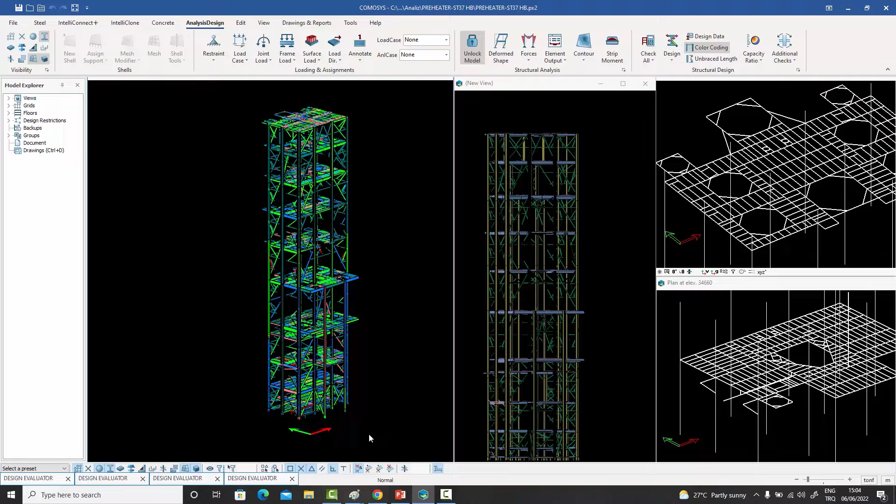What you do is you simply select the model and go to your Design Evaluator. So imagine this model has been given to me by a young engineer asking for my comments on it. I just press OK, and this fills up the Design Evaluator form. My whole purpose right now is to spend 10-15 minutes on this model and give the fresh engineer some feedback.

So the first thing it does is give me a breakdown of all the columns, beams, vertical bracings, horizontal bracings, girts and purlins, how much they are by weight. The columns are 53% by weight, the beams are 31%, the vertical bracing is 13%. And I can also see how the columns are generally failing. The normal stress ratio is averaging around 0.57. The lambda ratios are averaging about 0.118, and deflection ratios as well, because we haven't done the deflection checks on the columns. The overall drift check is different.

But more than that are these two over here, and these are typical areas where fresh engineers will make mistakes. For example, what I don't want is a lot of my elements failing because of lambda criteria. Let's say I don't want my lambda to be greater than 150 or 130, but they have designed it in such a way that a lot of elements are failing because of lambda. They would pass if they decreased the lambda and chose a higher section. But that's not what I want.

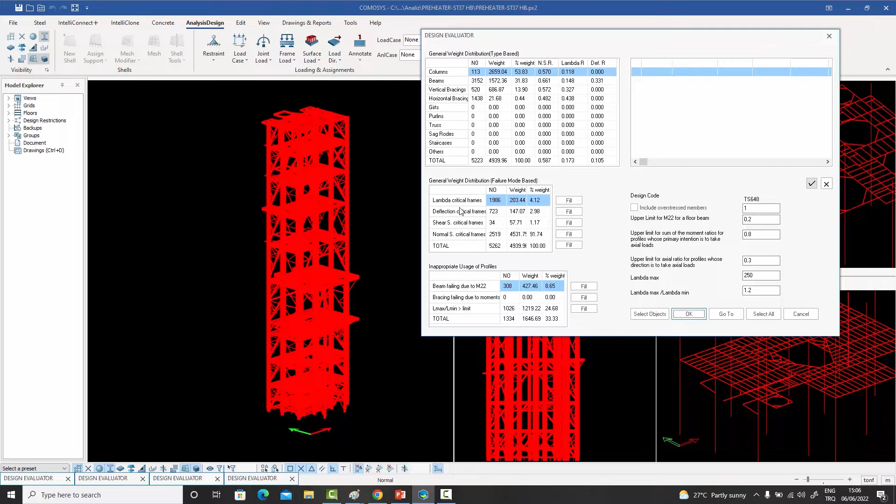What I want ideally is for all my sections to be approaching 1 as far as the normal stress ratio is concerned, because that represents optimal use of material. I don't want my elements failing because of lambda or deflection. Sometimes they have to, but that's not something I want. So this quickly shows me that 4.12% of my elements are lambda critical frames. I can press fill, this list is populated, and then I can select any one and say go to, and it'll take me to the model and show me exactly what's happening there.

The other thing I don't want is deflection critical frames. It says about 3% of your elements, which is fine, and this is not a bad design. I'm just giving an example that 3% of my elements are failing because of deflection. If I press fill, this list is populated again, and I can press go to and see individually whether there's something I could have done differently. Maybe I could have framed them differently and gotten a better design.

Similarly, what I don't want is shear critical elements. I want my elements to fail because of normal stress or bending stresses, not shear stresses, typically. So this number is reasonable again, only 1% where shear is governing. And for 91.74% normal stress is governing, and that's a very good sign. So this is a good design.

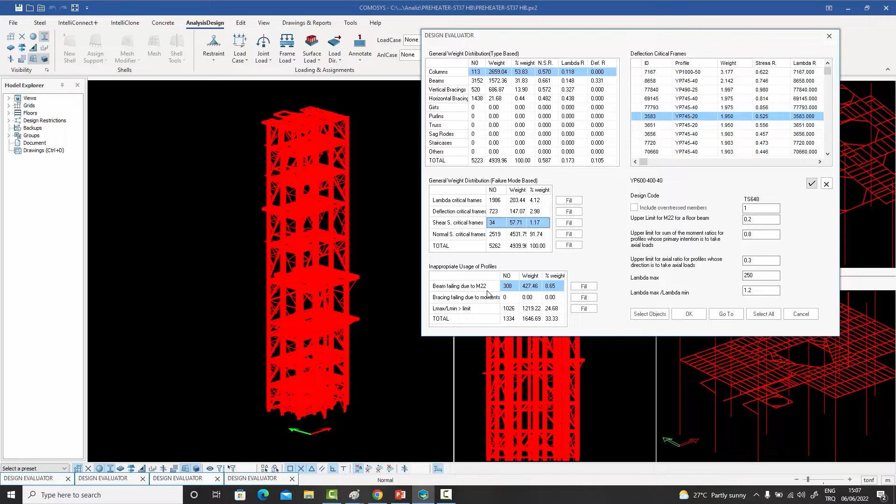But over here, we see these are floor beams. In floor beams, you want your beams to be dominantly loaded in the M33 direction. Of the three components, the axial component, the M33 component, and the M22 component, for the floor beams I want M33 to be dominant.

I don't want M2-2 to be dominant for the floor beams. But this one is telling me that about 8.65% of your total weight of beams has got a very high M2-2 ratio. So I'm interested in that. Let's press the fill button and go to this one over here and see that, okay, this one has an M2-2 ratio of 0.449. That's very high. I want this one to dominate.

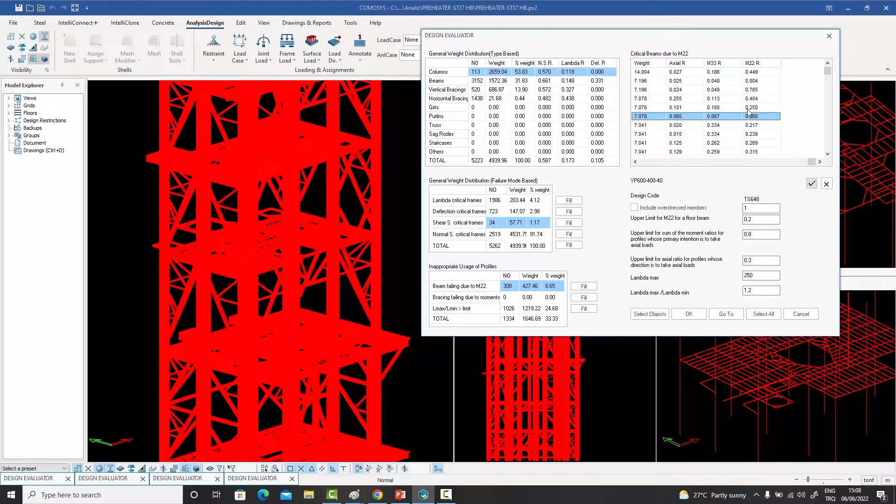So what I'll do is I'll select this one and say go to, and it takes me to that beam. And if I open up the design data, I see that yes, actually the bending 2-2 component is dominant, and that's not something I would have liked. So I can then take a look at it more carefully, and it's probably because of these horizontal bracings over there, and they're really pushing into it in a lateral direction.

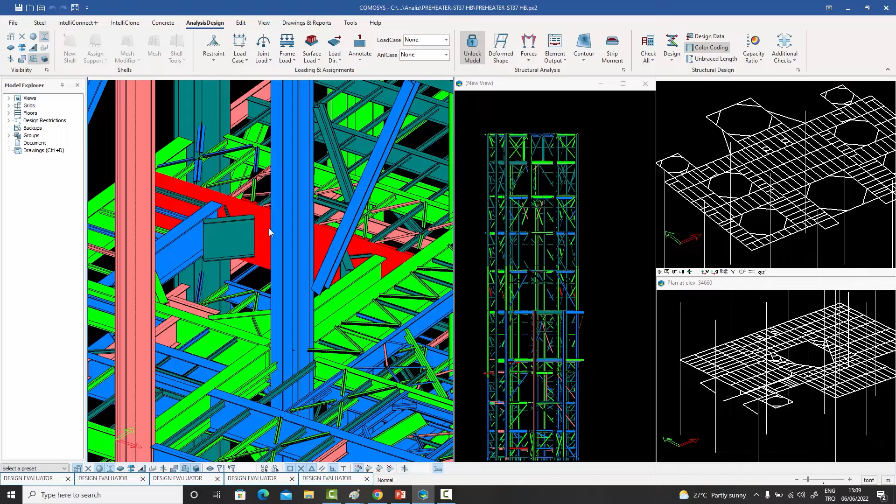So maybe that will give me an idea about what I can do with that, or what I can suggest, because this is a waste of material. This is not a good way of using this. What the program has done is, because the loads are in the M2-2 direction, it has optimized this section by just using a bigger and bigger section. But that's not good. I could have chosen a much smaller section had my lateral loads not been there, or if I had used a different type of section, maybe.

Another thing which I don't want is for my bracings, say my vertical bracings or my horizontal bracings, to be failing or having a significant component of moments in their design. I want them to be primarily working for the axial loads. But sometimes when we have these large bracings, even their self-weight can cause bending moments. And sometimes if they're not supported along their length, that bending moment can take up a lot of their capacity.

Now, in this case, we don't have any of those, but there's a limit over here. Let's see, where, for axial loads. So it's 0.3, and you can change these numbers over here. So yeah, this is the one. Upper limit for sum of the moment ratios for profiles whose primary intention is to take axial loads. So I can reduce this number to 0.2, for example, and I can see which ones are failing according to that.

Then I have this lambda max over lambda min limit. This is also important. Obviously, every profile will have a weak direction and a strong direction, and there will be a lambda max and a lambda min. And typically, I would want these two numbers to be close to each other, because if lambda max is much bigger than lambda min, then it's obviously going to fail in the lambda max direction, and that's going to be a waste of material. So this is the lambda max to lambda min ratio 1.2, which I've specified on the right hand side.

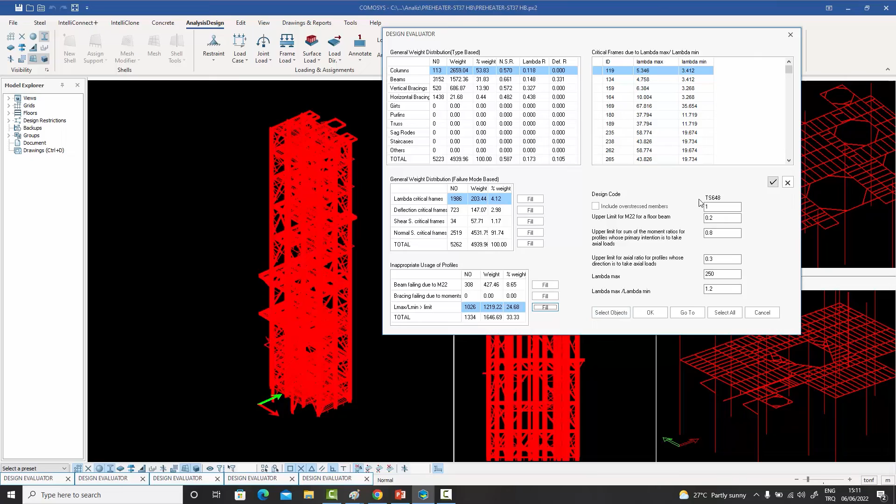So you can have lots of elements failing due to deflection. You can have lots of elements failing due to shear. You can have lots of floor beams in which M2-2 is dominant. You can have bracings failing because of moments. If I were to just take a look at the color coding, I would think, okay, this is a reasonably good design. But my whole idea is to spend 10 minutes, 15 minutes, and give the person some sort of feedback which they can use to modify the design, because you can have everything green and still it could be a horrible design.

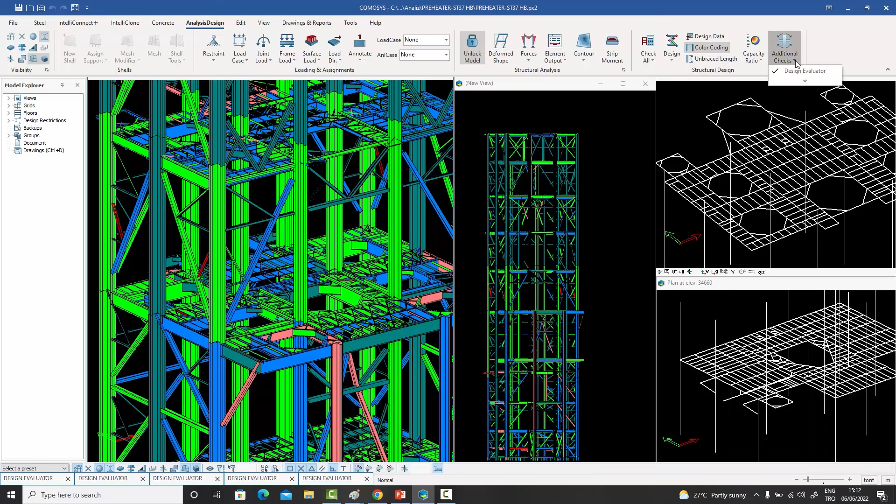So this design evaluator is a very nice feature which you can use to quickly go through as a senior engineer in the company, because when your junior engineers are forwarding you their models, you can go through them in 15 minutes, 20 minutes, half an hour, and give them a lot of nice comments which they can use in their refinement of the analysis.